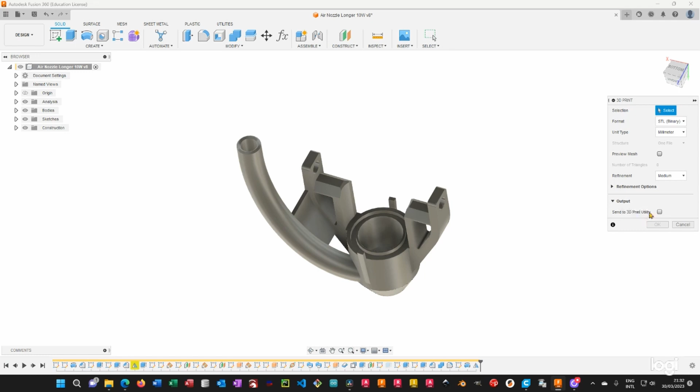The way you export it will change a little bit depending on the software, but in general it's pretty straightforward in most of them. Now here in Fusion 360, once you're ready with your model or part, you can go over to File, 3D Print. Then you will need to make sure that this Send to 3D Print utility isn't toggled. Click the model, and then click on OK. Now here you can name and save your file.

Now once you're done with that, let's jump right into CURA. For this demonstration I'm going to show you how to work with CURA. That is slicing software that is actually included in the micro SD card that comes with the Longer LK4X, and this is the version 4.12. Along with the software they also include the machine configuration and material configuration files. I'm not going to show you how to set that up, so I'm going to assume that you are already set up with the software.

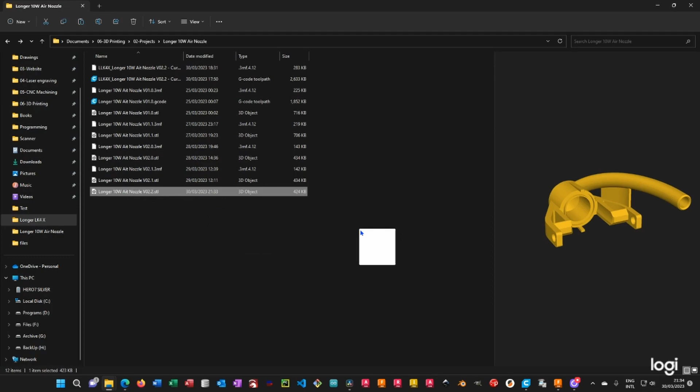So my purpose here is to show you the workflow to slice your model and to give it to the 3D printer for execution. Right here in this environment, this is the prepare environment. We are going to drop in our material. So you can either click here to open the browser, or you can directly browse yourself and then drag and drop into CURA.

Now the first step, once you got your parts into the slicer, is to arrange them. Actually, the first I would say is to orient it, and the orientation should take into consideration three factors. The first one is the strength factor, which I'm not going to cover in this video. The second one is the orientation by which your model is going to be the most stable during printing.

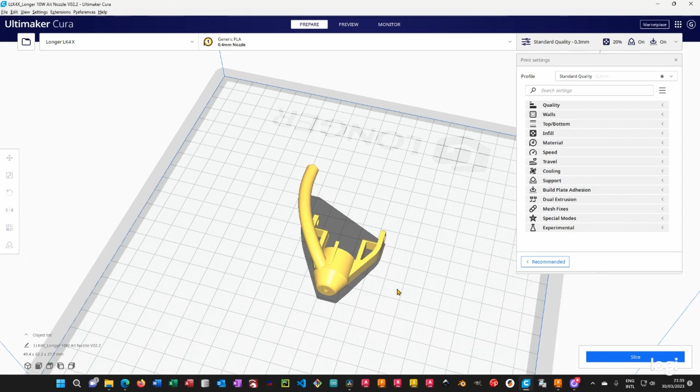Also the direction at which you will use the least amount of supports. I mean you want to avoid supports as much as reasonably possible. And then the third consideration is beauty. So if you wish to have the layer orientation in one direction rather than the other.

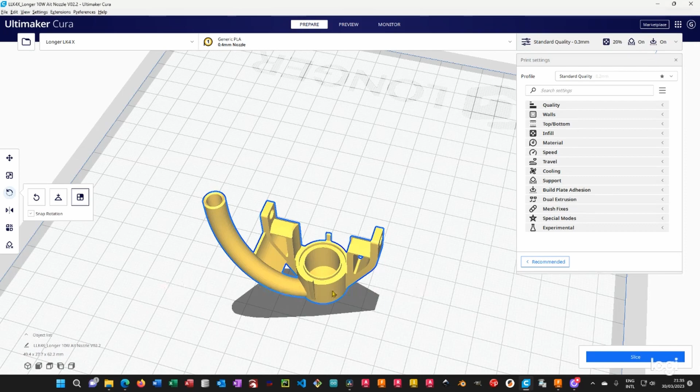And so in order to do that, first you need to click the part, and here you can move it, but what we care about is rotating, and we can also click select face, and I'm going to select the face that I want to be touching the bed. So with that out of the way, we can zoom out a little bit, and you can then also move it wherever you want.

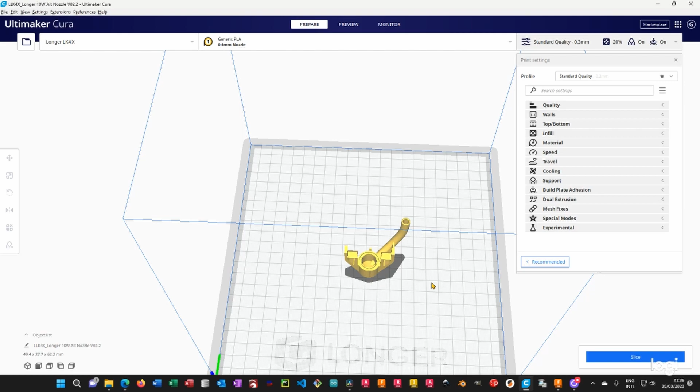Now here, if you had multiple instances of the same part or other parts with it, you will want to arrange them onto your bed, and in the arrangement you want to make sure that they are as close as possible to each other, so as to limit the amount of free travel that the machine has to do, which is wasted time. Alright, so once you're done with that, I'm going to slice it.

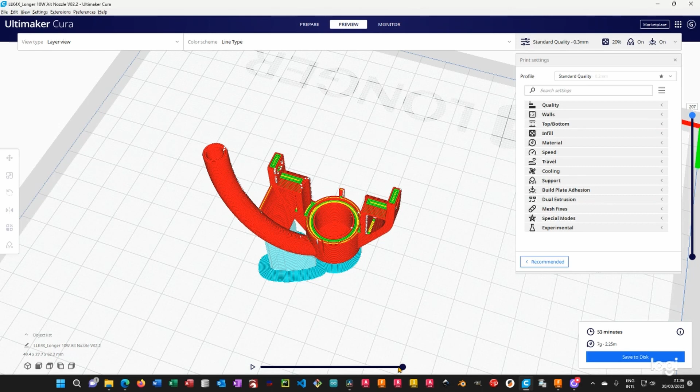That's actually a very simple process, and we are going into the preview tab so we can see the actual sliced model here. Now here you can use the right slider up and down to move through the layers, and the bottom slider left to right to see the actual layer executing.

Now this is a pre-slice, meaning that I didn't set up the things, so I'm going to walk you through the setup. When setting up your parameters, your print settings, as they are called here in CURA, you will need to take into account a few things, and most importantly, the material that you are going to use.

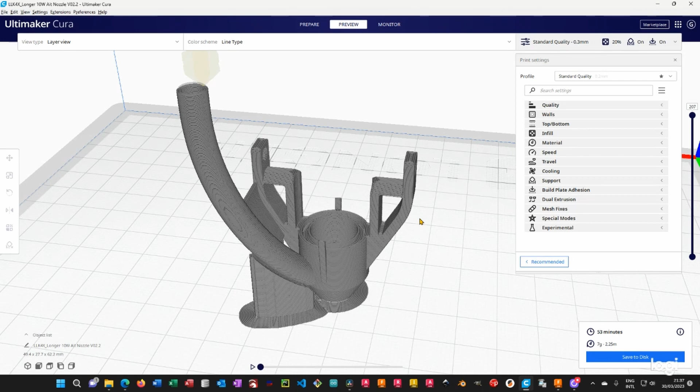Now, I'm assuming you are going to print with PLA because that is the simplest material to work with and is the material that most 3D printers include. Now, let's start with quality, okay? There we go. Now, if you see so many parameters, that could be a little bit overwhelming. I do suggest you to switch over here to the basic mode, okay?

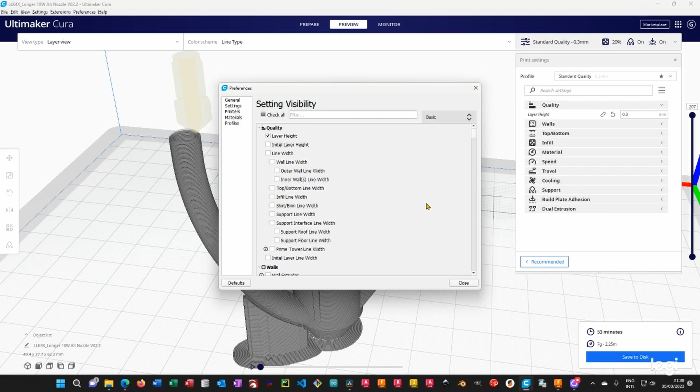Now, you will see me switching back and forth between basic and advanced because I will need to toggle on and off certain features. Also, if you want to have a predefined set of parameters, you can go over to the settings and here you can toggle on and off what you want. Now, if you're starting out with 3D printing or if you're starting out with this software, you will most probably do this along the way, okay?

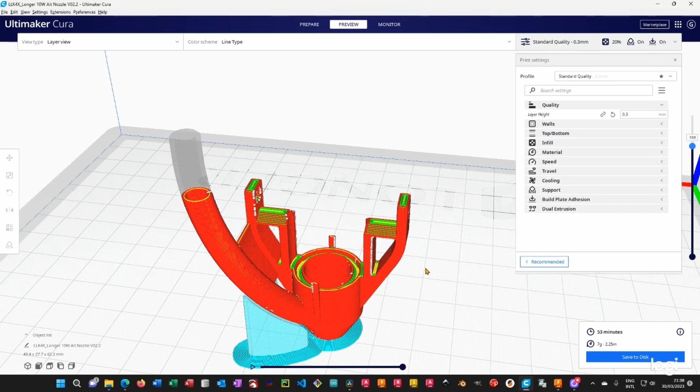Now, under quality, we get the layer height. That's the actual thickness of each individual layer. Now, this is going to change. You will need to change this parameter depending on the amount of details that your model has or that you want to achieve with your model, plus strength consideration that I'm going to leave out of this video.

Now, what I found working good is 0.3 millimeters. This is pretty good for most projects. Sometimes I drop down to 0.2, but that's pretty much the maximum I go. 0.1 is really, really fine, and you will want to do that if you have a very highly detailed model, okay? For example, cartoon characters or something like that. And so that's why it is called quality.

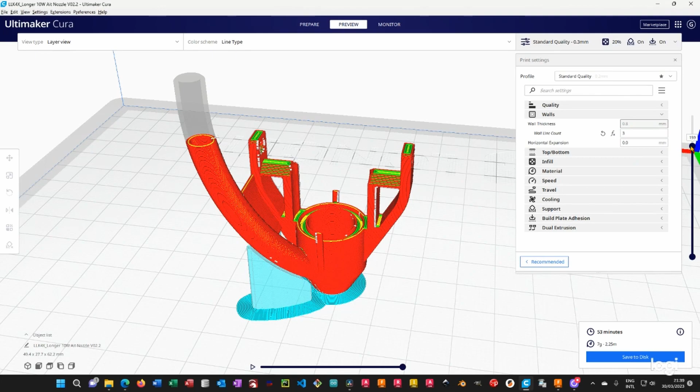Now we are going to touch up on walls. Now for the walls, all you care about is the wall line count for the moment. Now what that is, let me go into a layer. This is the line count, 1, 2, and 3 as we set it here. So for the external feature and for the internal feature is the same. Similarly for top and bottom, 3 layers and 3 layers.

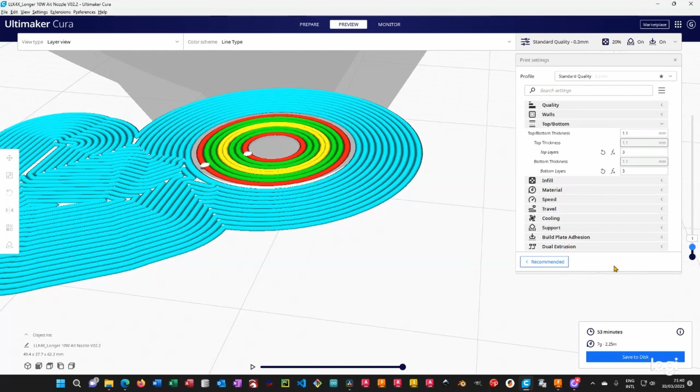So if we go to the bottom, now we can actually use the arrow key. So 1, this is the first layer, second, third layer, and then the fourth layer you can see already voids, and in orange you see the fill. So that's exactly what we set here. Now in my experience, 3 layers for both the walls or perimeters and the top and the bottom face work just fine. Then you want to go to the infill.

Now under infill, as a beginner, all you care about is the percentage. Now you don't want to get a full part, so a 20% or up to a 20% is what you most likely want to go for. And the other thing is the grid, the infill pattern. This is basically the pattern inside.

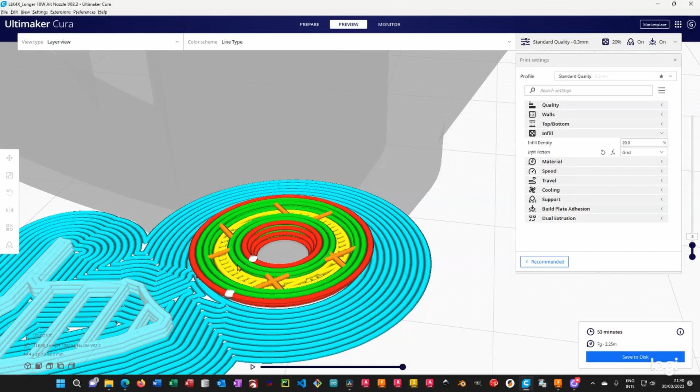So let me change it real quick to, let's say, cubic, for example. Let me reslice it so you can see how that changes. Let me go up. And so, I mean, you can play around with this, and this is going to change how the inside looks like. Also here, strength consideration will also play an important role.

Okay, then let's go to material. As we say, we are going for PLA. Now, for the printing temperature, you can refer to the spool of material if you bought it, either on the packaging or on the spool itself. There will be written the ideal printing temperature or temperature range, both for the extruder, which is this, and for the build plate.

Now here, a quick consideration if you have a PEI bed, like in the case of the Longer LK4X, and that is, this material relies on the temperature in order to grip the part, to keep the part in place. And when it cools down, then releases the part. Now, sometimes for certain material or certain different type of beds, you might run at higher temperature for the first layer and then drop down for the remainder of the project.

However, in this particular case, I found that even a 10 degrees drop might cause adhesion problems and your print may fail. So in order to go there, you will need to go over to advanced, as you can see here. And so here, build plate temperature 60 degrees and build plate temperature initial layer, set it as well to 60 degrees.

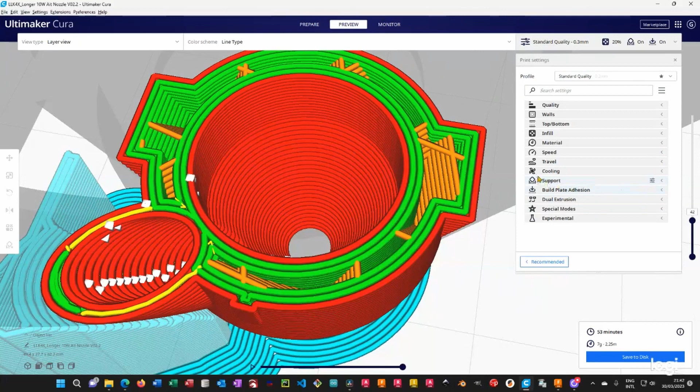Okay, with this out of the way, speed. I'm not going to touch on speed. Bear in mind that the defaults are pretty okay for most projects. If you want, then you can experiment. You can go faster or slower according to the specific needs. Travel, I'm not going to touch on that. Cooling neither.

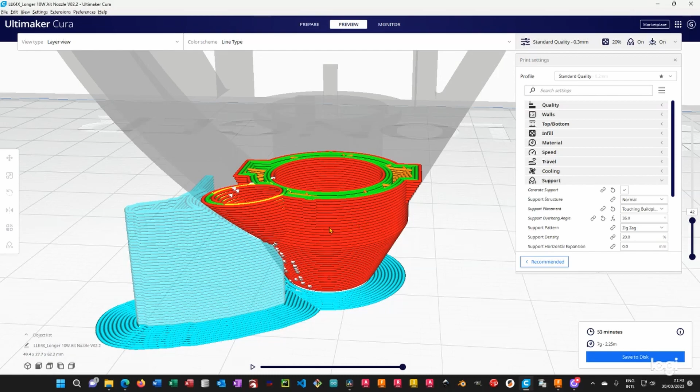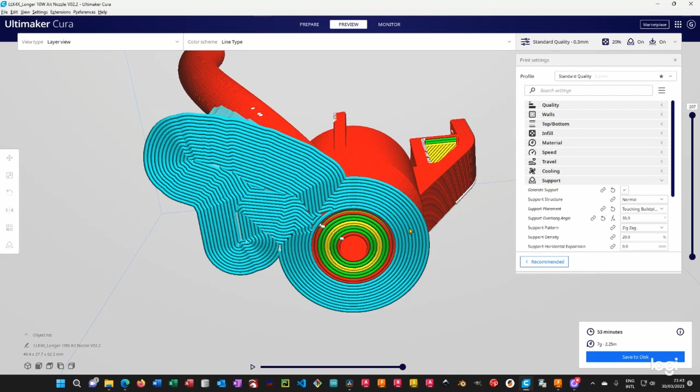Supports. Now, this is another important thing. The supports are going to help you build your project, to build your model. There will be certain parts which are not supported by the body's own structure, and so you need external supports for that. Now, I have designed this model with support-free in mind, so there is no need of support. However, in this particular case, because the patch or the contact area is very small, there will be not much adhesion to the bed.

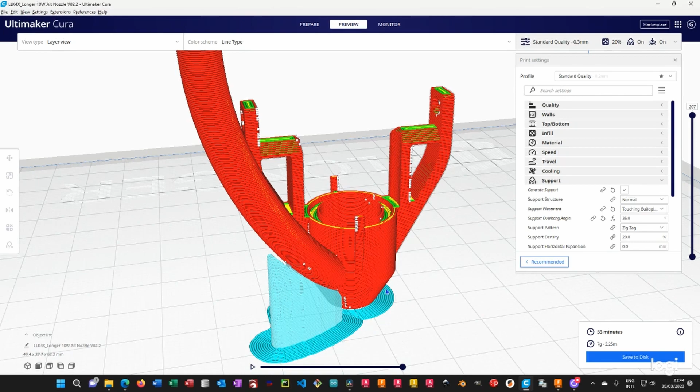And also the part is going quite tall vertically. So I just wanted to add a little bit of rigidity or stiffness to the model while it is printing. So I am just adding a little bit of support here so that it's going to grab a little bit more onto the model.

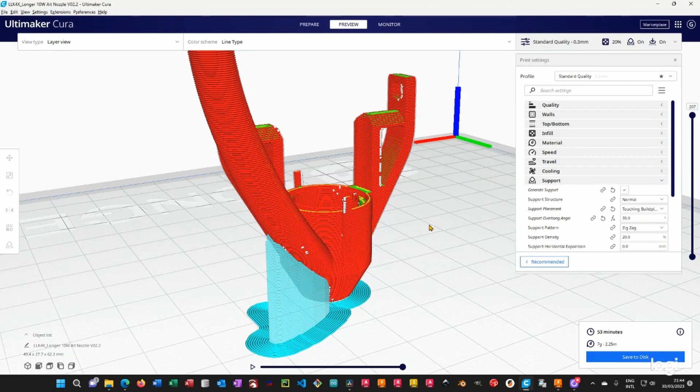Okay. Now here you will need to test your machine. In this case, if you had a look at my video review for the Longer LK4X, I have already run the all-in-one test, and I was able to basically verify that you can have overhangs up to 60 degrees unsupported, and they will be pretty acceptable. Now here you see me dropping to 35 degrees, so that I can avoid supports over here and over here, and I can just have it in this area where the hose is going to be.

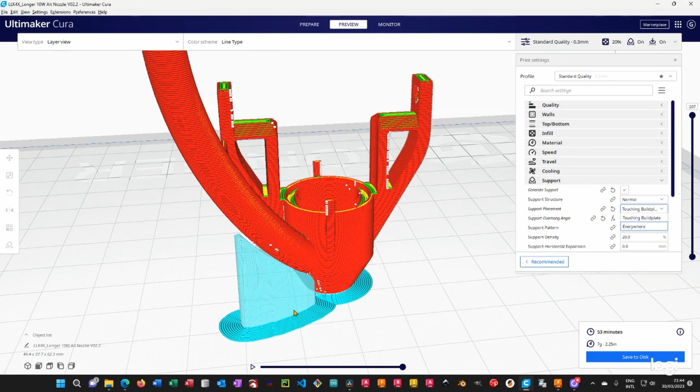Okay. Now here you have an option which is for the placement. You can choose either touching the build plate only, or everywhere. If I reslice with everywhere, you will see that we are going to get supports generated inside of the model itself. Now for these small holes and also for these short bridges, supporting material is normally not needed. And that is something also that you can see with the testing that I performed in my previous video. You can see how far you can bridge.

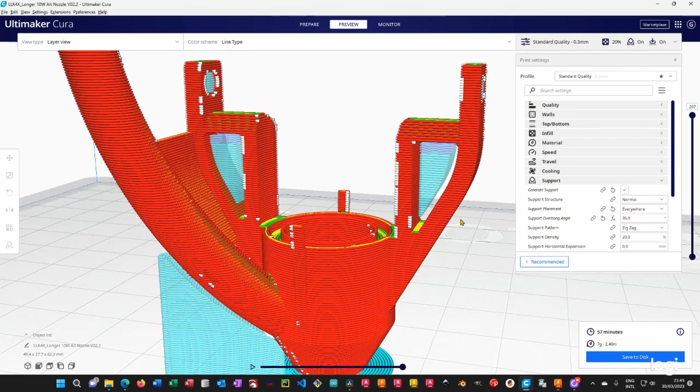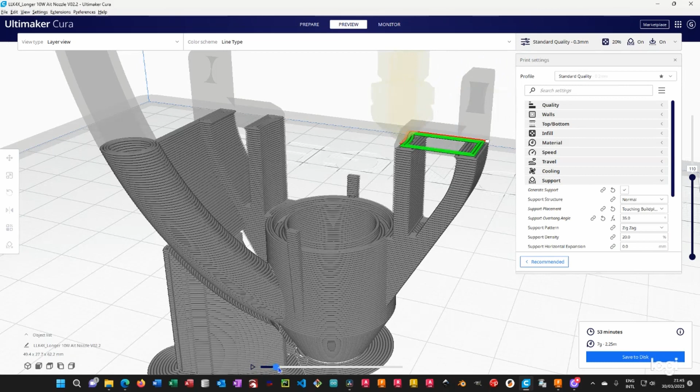Now the only important thing, let me put this back into build plate only, is to check your first layer where the bridge starts. Use the cursor here, and make sure that the extrusion starts at a supported place and ends at another one. So as you can see here, we start at the supported side and then we go across and down here. Okay, so the slicer will take care of that. You don't need to take care of that, but it's good to check if everything is actually okay.

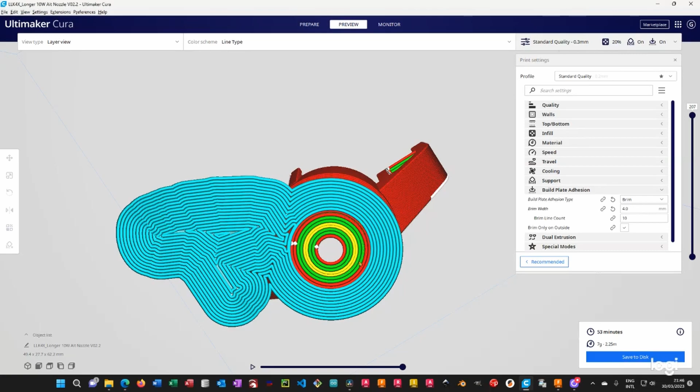And finally, we get the build plate adhesion. This is in order to make sure that you are actually going to stick to the bed properly. Now there are several ways to achieve adhesion. What I like to use personally is brim, which is what you are seeing right now on the screen. You can see that this is actually the model, and then this in blue is the brim extending out. Now here the only parameter you need is the brim width, which I would suggest to be in units of millimeters, for example.

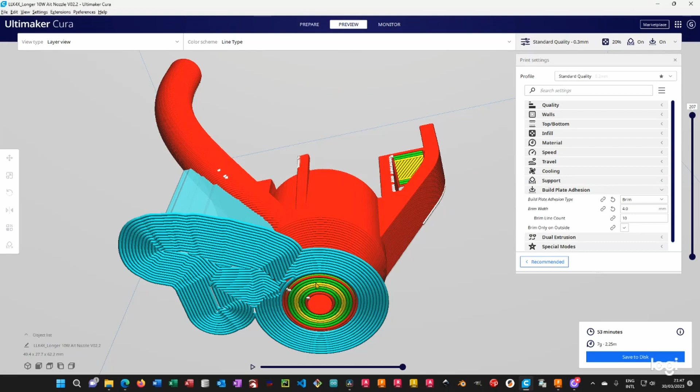And so you will need to assess your model. For this particular model, a 4mm brim is going to be more than enough. This will basically help the entire model to not rely only on its contact patch here on the bottom, but to have a larger area. And the cool thing as well is that the brim extends also around the supports. There is an option to toggle that off if you don't want that, but in this case I'm going to go for it, so I'm going to be sure that everything sticks up to the end of the project.

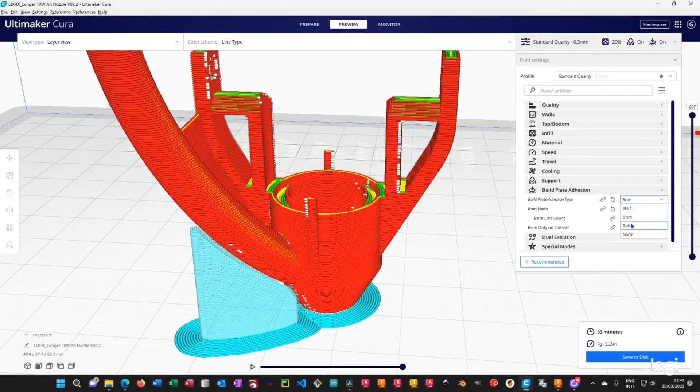Now the other option would be to use a raft. The raft, let me slice it so you can see it, is going to basically create like a platform, like a slab under the entire model.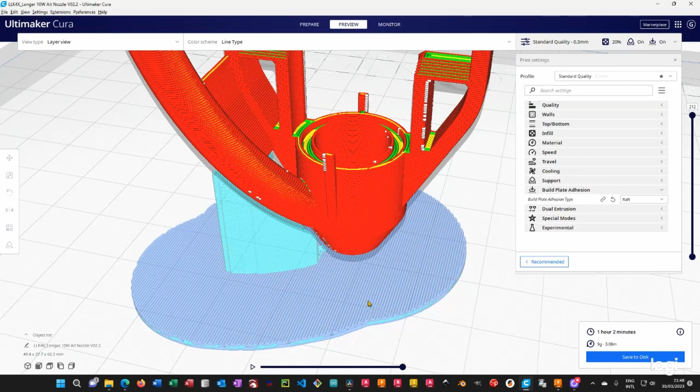That is something that I very rarely use, and that is because it's a lot of material, and for me it's a waste of material and time. Also, sometimes the model bonds so well to the raft that it's very hard to actually detach it without damaging your part. For this reason, I'm always going for brim. If your model happens to have a large base, you will most probably not need any brim or raft. All right, this is pretty much all.

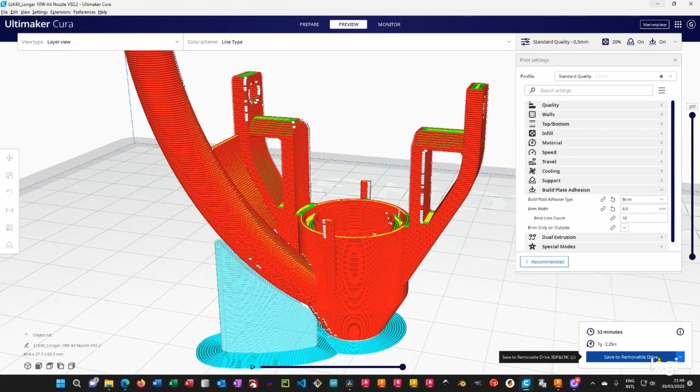So once you're done, you can just export your sliced file into G-code and give it to your 3D printer. You can either save it to your local drive, or if you have an SD card already inserted into your PC or laptop, you will have the option Save to Removable Drive. Click on that, and the slicer will basically name it and save it directly where it has to go. Then you can also click on Eject to remove your SD card.

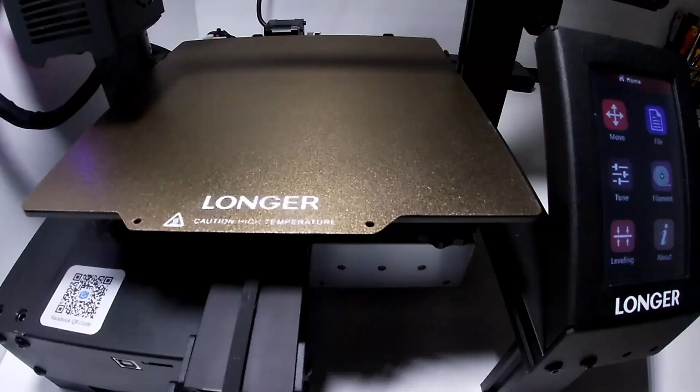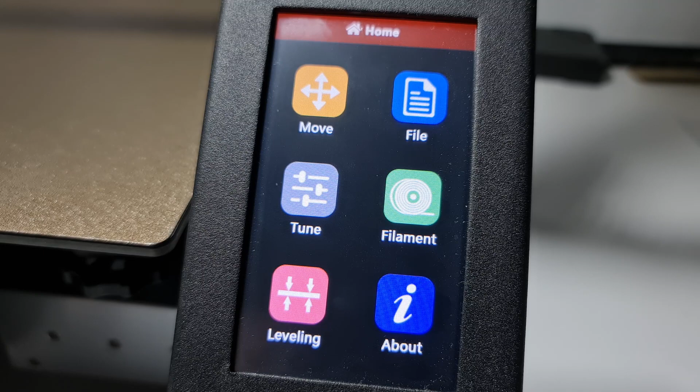All right, so let's now jump onto the 3D printer. Let me show you how to set everything up and how we are going to print. Let's get our SD card and insert it into the slot. Now power up your machine. The machine is already running in this case. The first thing you will want to do, rather than selecting your file, I prefer to go over to Filament and then select the material preset.

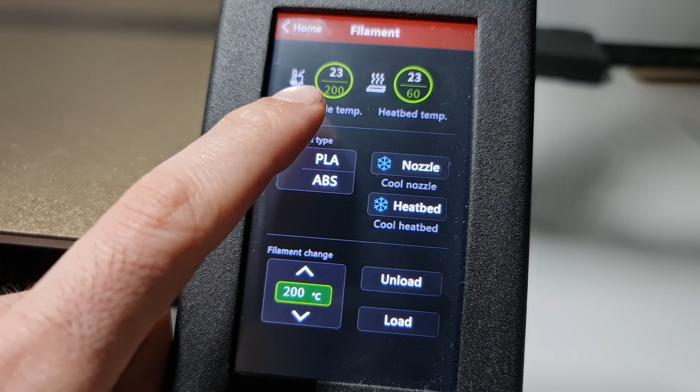In this case we are going to use PLA, so I'm going to click on PLA, and you see the preset is 200 for the nozzle and 60 for the bed. I will leave it a little bit to warm up. What I highly recommend you do before each print is to clean the bed a little bit with some isopropyl alcohol.

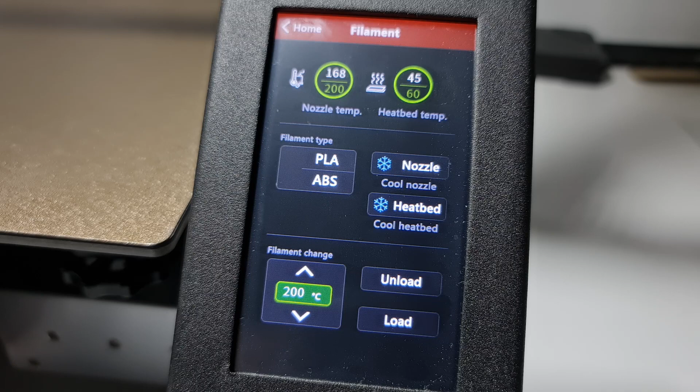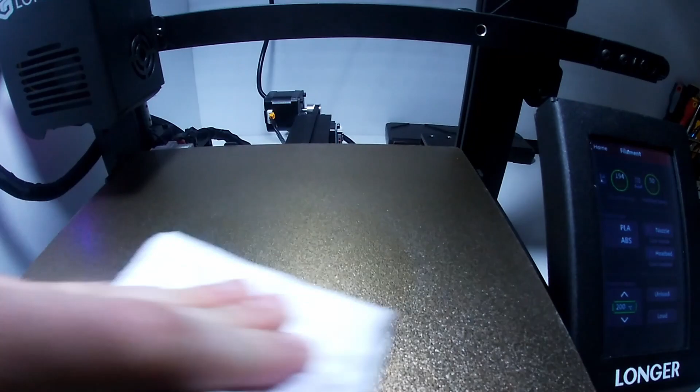To do that, I'm going to spray some alcohol only on the area where the model is going to be, and then I'm going to wipe that off. This is going to remove residue of everything, including, most importantly, the oil from your fingers. So with that done, the bed is almost ready, so we can go over to File.

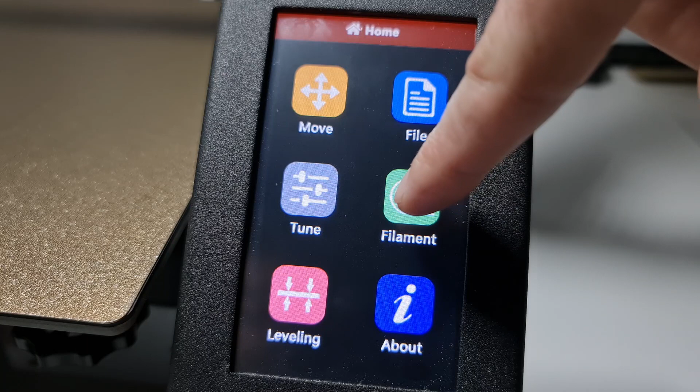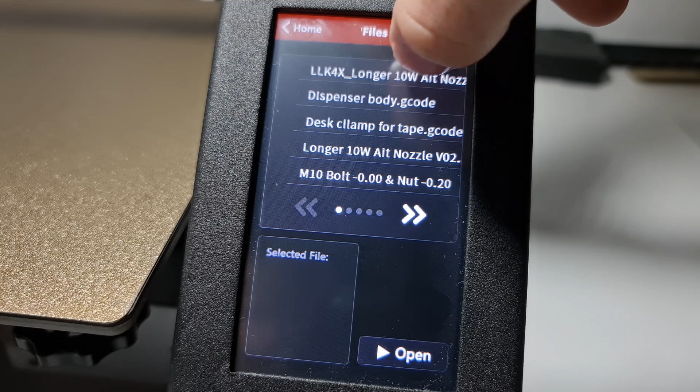The machine orders your files in chronological order, with the last one at the top, so it is very easy for you to click the last one, then open, and then start printing. This is going to wait for the bed to be ready before initializing. If you left all of the settings in default, you are going to see your machine go through the auto leveling process and then start printing.

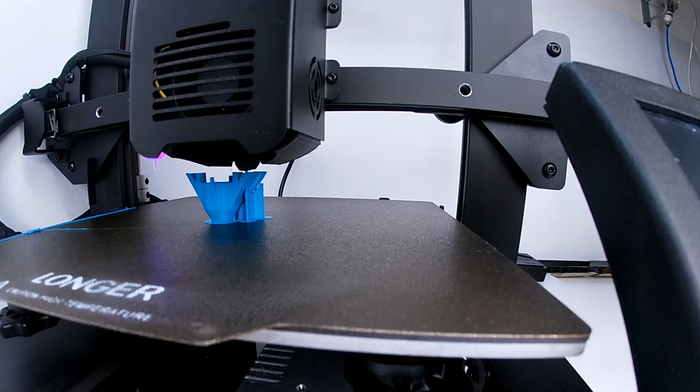All right, so as you can see, the machine is done printing, so we can click on finish. It took 59 minutes, by the way. And now the bed is already cool. If you want to check the temperature, you can go over to Filament and see the temperature here. Okay, so now I can pull the bed. Let me turn on the other light. When it's cool, it should come off very easily, as you saw here.

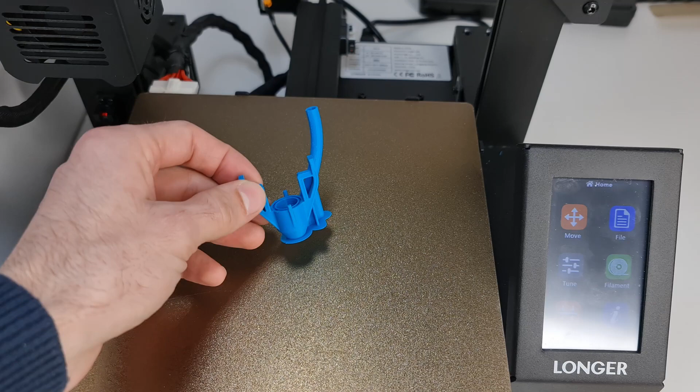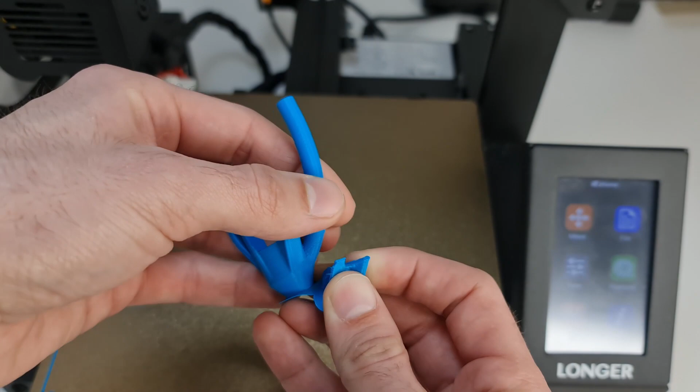And this is the part. As you can see, it's fairly clean. It is not perfect. The machine still needs a little bit of tuning, but it did a pretty decent job, and supports plus brim should come off very easily, as you can see.

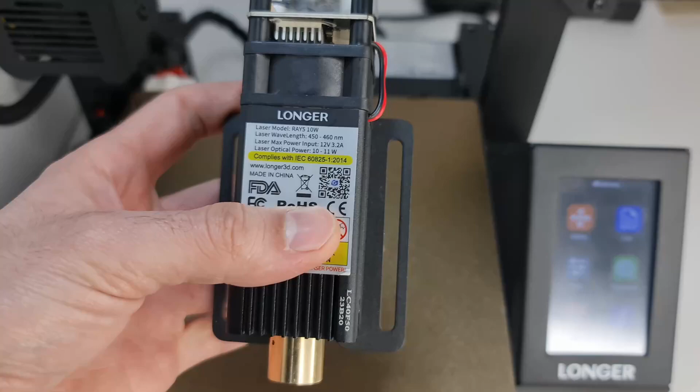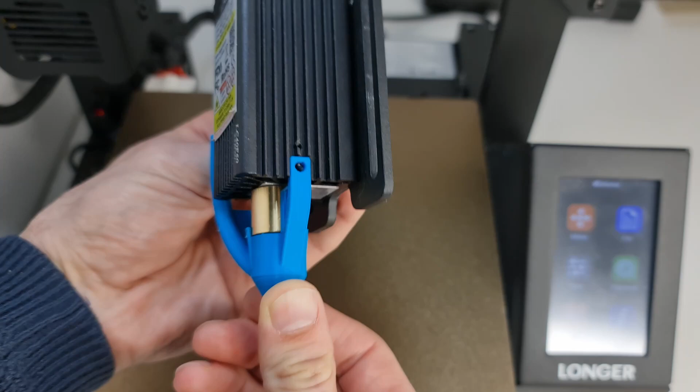Now let's perform a very quick fit test. This is the 10 watt laser module for the Longer LK4X machine, and that's actually supposed to be the other way around. As you can see here, we are perfectly fine. Then 2 screws will go on either side. The pipe will come over here, and here there will be a small place recessed for the gasket.